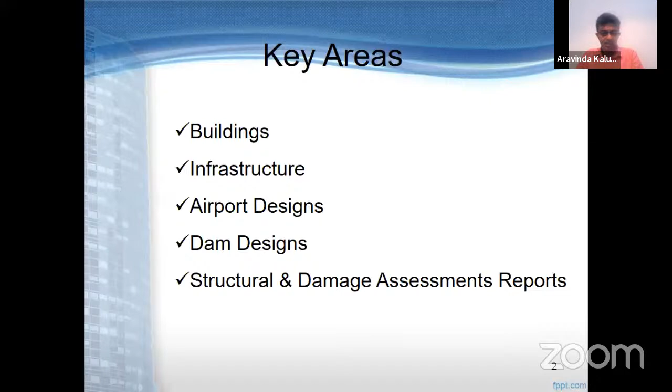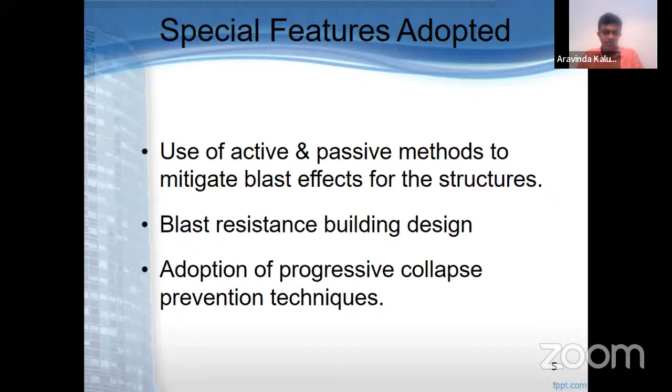And the special building - I will start with building for the special building because we have done many buildings, but of course we have done some special buildings. One is the Defence Headquarters Complex, where the employer was the Ministry of Defence. CECB was the whole consultant, and the contractor was Strike Forces. Some of the key features of this project were the use of active and passive methods to mitigate blast effect on the structure, blast resistant building design, and adoption of progressive collapse designs.

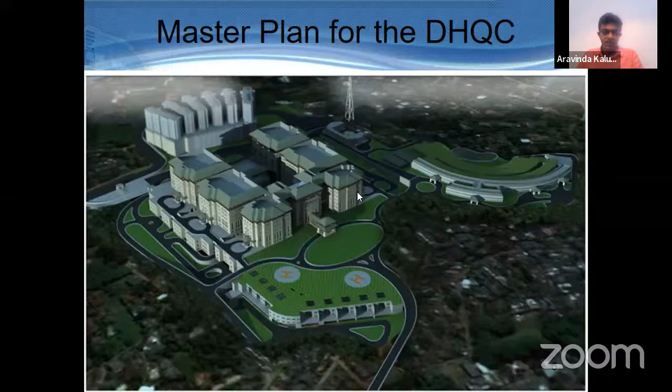And you can see the complex - it is 8 individual units connected to each other, and this administration block is there, with 2 parts yet to be commenced. One is the officer mess, the other is other ranks' officer accommodation. I hope that will also start in future. So this is the final appearance of the building of the part that we had already completed.

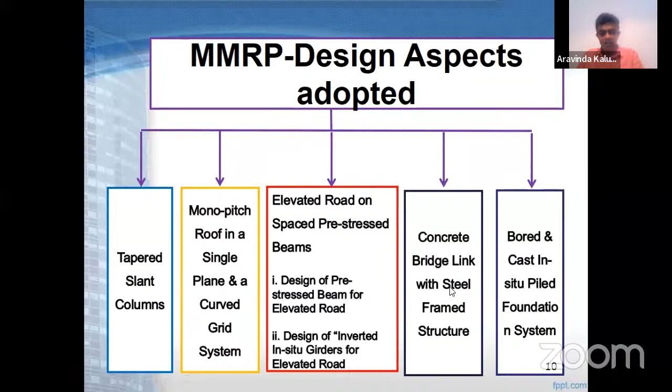And then under the infrastructure development project, I would like to give some brief on this Manning Market. This also shows our capabilities of being modern-like in building design. There are a few design aspects to be highlighted: one is the taper slanted column - you can see this feature as you go through the highway - and the monopitch roof, and also the elevated road resting on the pre-stressed beams. And this concrete bridge links with the steel frame structure, and bored piles we had done in full. So some of the featured elements are shown there.

I'm actually going very fast because I know this is not the time to talk on this subject.

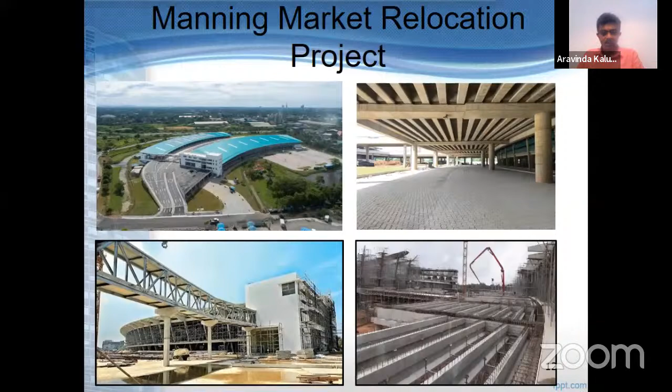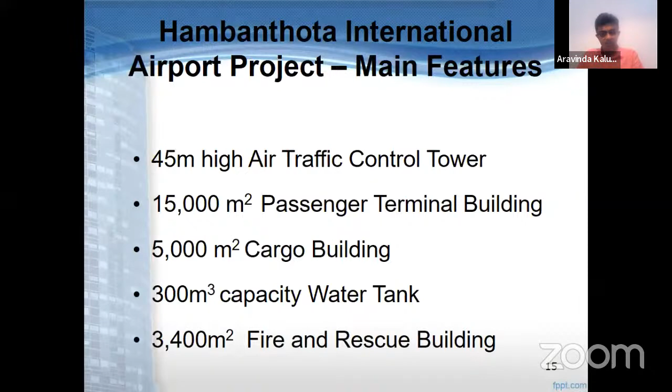And these are the things that you can see. We have also done some airport design, as mentioned, Sarasi. The Mattala Airport design, structural design was our scope, and we did a 45-meter high air traffic control tower and a 15,000 square meter passenger terminal building, cargo building, water tank, and fire rescue building.

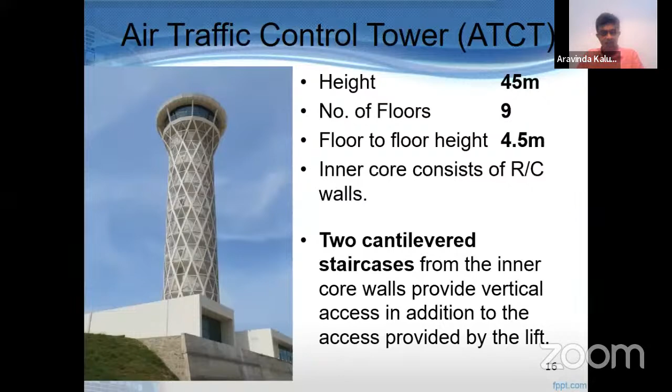So you can see the ATCT, which I think is the most visible building in the complex. It is 45 meters in height, 9 stories, 9 floors, with 4.5-meter floor heights, and 2 cantilevered staircases as a feature, which you might see when you visit the premises.

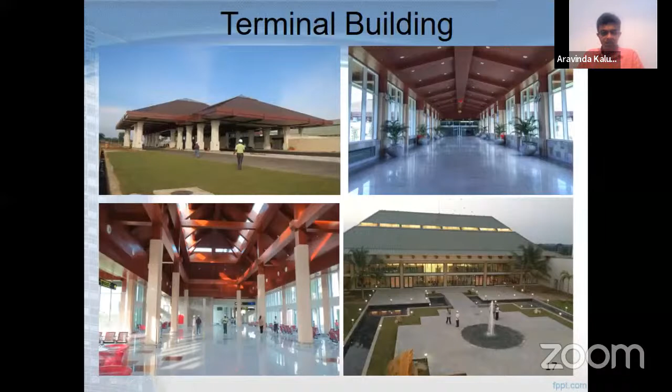So this is what you can see from there. You can see these very elegant structures, based on the architectural inputs we received from an Austrian architect. One thing I could mention here is that we actually got these services from others - this is a good example of how we can work with foreign consultants. ACOM was the designer, we were the structural engineer, and China Harbour was the contractor.

And these are some featured buildings - the cargo building, a very tall building in its day. This has about 100-meter length and 50-meter width, with a large space provided for the cargo.

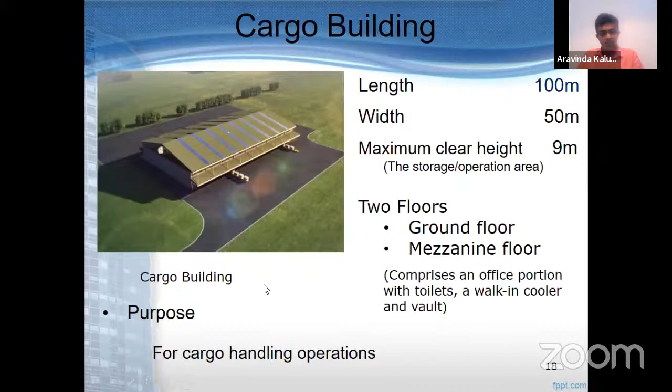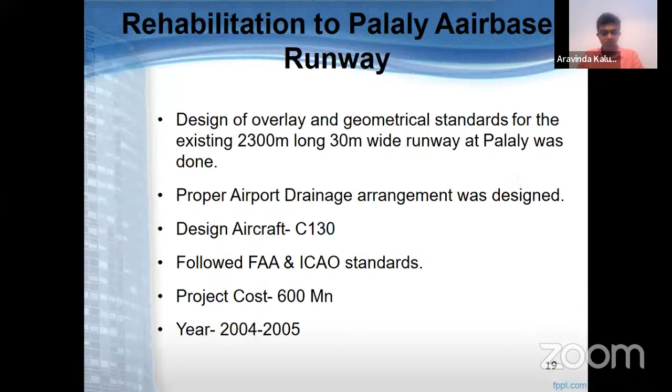And the rehabilitation of runways - actually we had done some runway work at Ratmalana that was not implemented, but we have done the Palaly Air Force Base runway rehabilitation, and we have the capabilities of doing that. And dams and large reservoirs is another featured and landmark

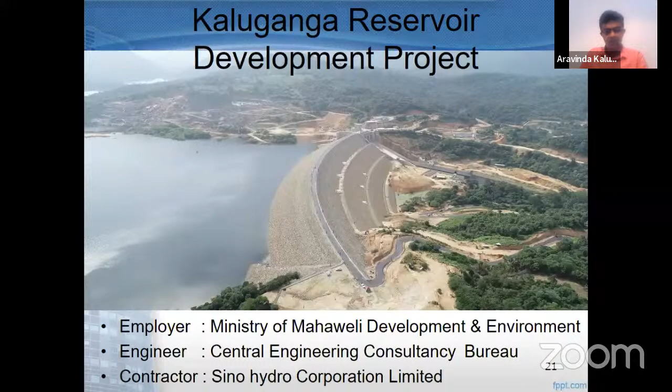capacity of CECB, and one recently developed project was the Kaluganga development, though we had done many in the past. This has got a 618-meter length, 68-meter rockfill dam, and also a saddle dam of 720-meter length.

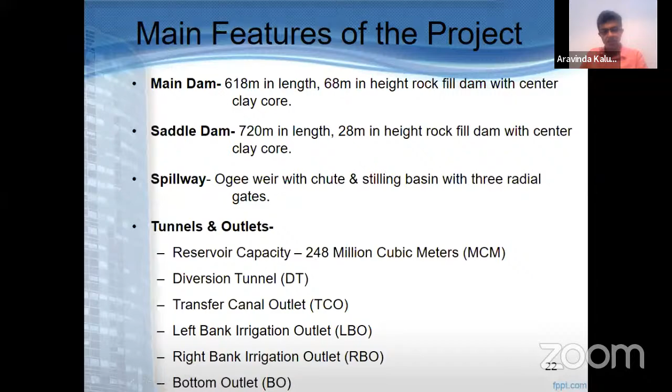And these are other features. 248 MCM capacity reservoir we built actually. And then you can see the overall view of the Kaluganga project.

And one featured thing that we are doing today is structural assessment and retrofitting, where the demand is growing. In the retrofitting area, we can talk about a few areas like fire damage, bomb blast resistant retrofit of buildings, and retrofitting of deteriorated buildings.

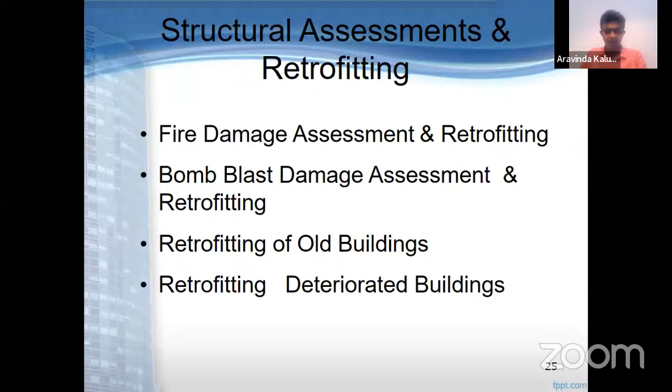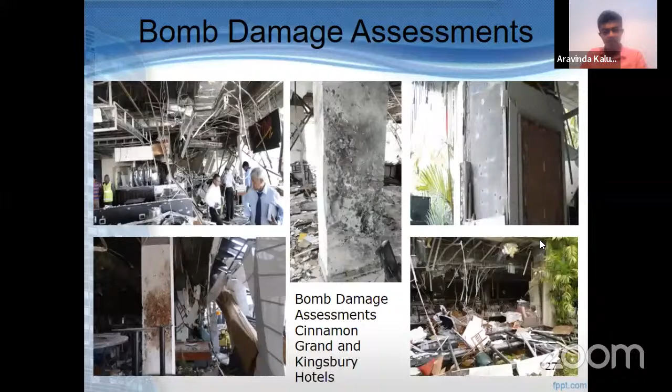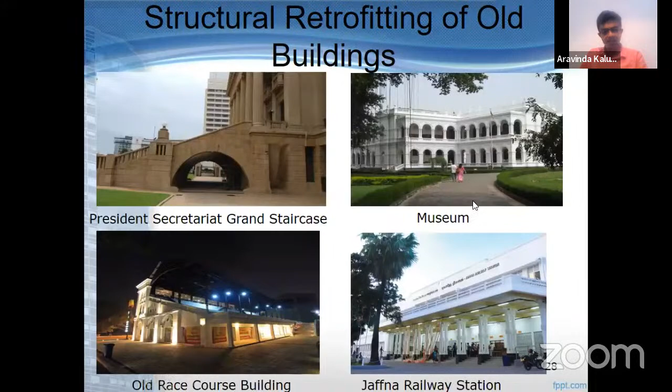And also we did the retrofitting of old buildings like the President's Secretariat, Museum, and the Race Course building, and also in Jaffna. These are some of the highlights.

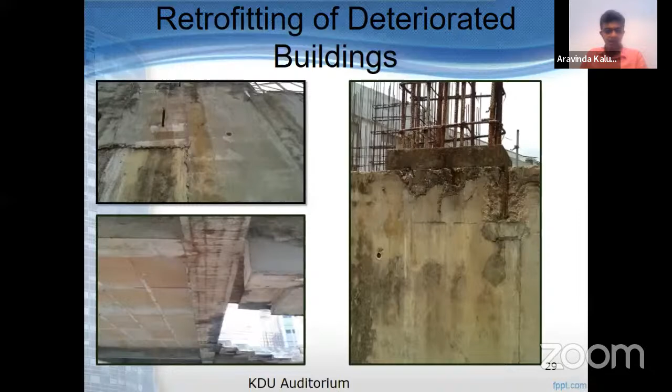And also the retrofitting of the deteriorated building is the KDU partly completed building, which we undertook to renovate and reconstruct. Now it is at the last phase of the project.

And with that, I will conclude my presentation, because I hope there are many more waiting on your side. So I will stop my video sharing, and the next thing I want to say as a summary is that - I hope this will not be the end of our journey, and I hope there will be many more CPDs and knowledge sharing sessions in the journey as we expect to conquer the world.

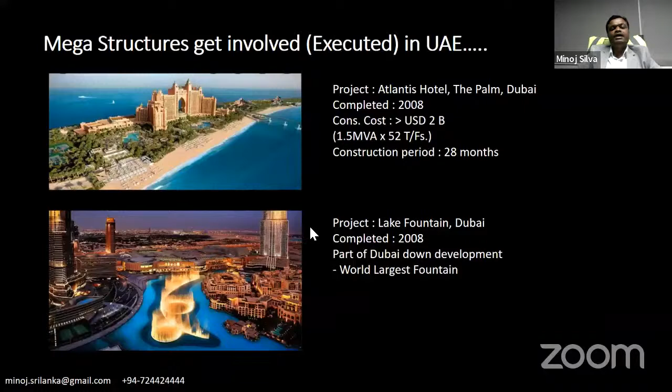Then I have worked Lake Fountain, Dubai also as a testing commissioning engineer for some months for the same company. Then some other mega structures in Dubai. I think who has Middle East experience, they should know these projects.

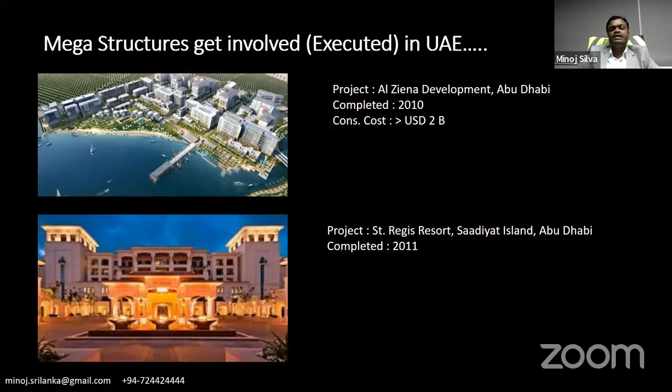So when I resigned from Dubai work, I finally worked for New York University, Sadiyaat Island, Abu Dhabi. It is again very big projects. Why I explain this project is through my case studies and knowledge sharing.

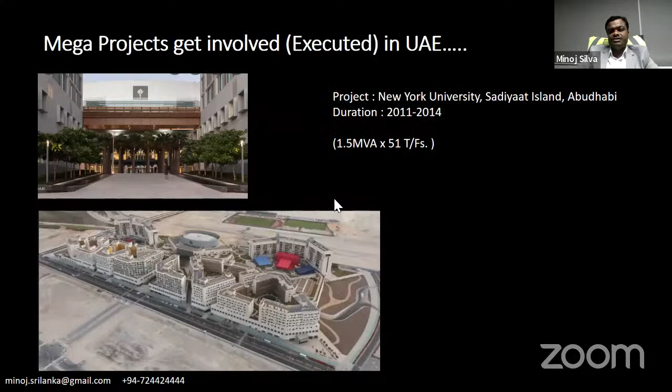In coming slides, I will use these projects. So these projects I have involved in as construction. During the construction, it's been part of post-construction team. Also during my time in BK Gulf, in normally Middle East, as Nalin explained...

In 2008, a new concept they started to practice: pre-construction. It came with the international global financial crisis. It badly hit Dubai as well. Then in the project management model, they practiced pre-construction. Pre-construction means - I will explain later more.

So these are the pre-construction projects I personally was involved in. Some projects we got, some projects we lost. It means Tameer Towers in Reem Island, Cleveland Clinic Hospital Abu Dhabi. This is at that time. This has been called a 7-star hospital. 7-star means it's a luxury hospital for the royal family as well.

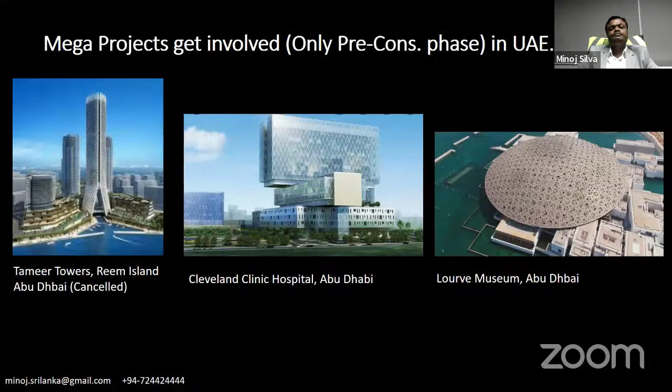So Louvre Museum - this is a branch of Paris Louvre Museum. So these are the pre-construction projects I involved in.

Today's session I am going to discuss these areas: international construction market size and growth rate, analyze the history and future of construction industry, today's engineer role in competitive construction industry, pre-construction in modern construction industry, and pre-construction tools and benefits from pre-construction with some case studies.

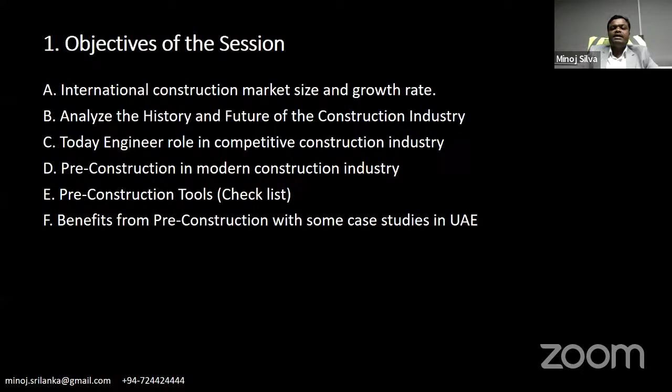Sadly in Sri Lanka now, our construction market has been dead - almost dead. That's the reality. As per my knowledge, and I think some of you also are very well aware, this will not come up to like previous progress till 2025, 2026.

But as engineers, as I said, engineers are not made for the local. Engineers are made for the global context.

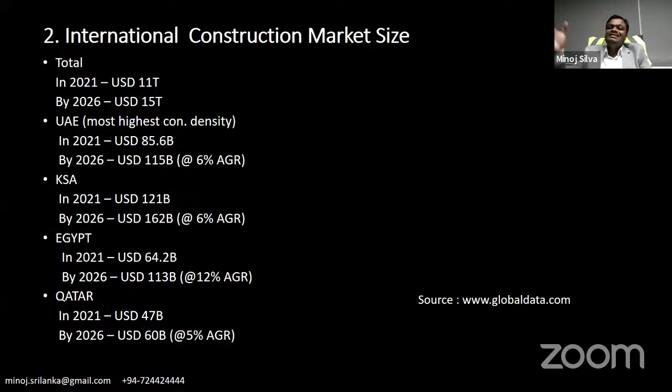Then sometimes you have to find a job for yourself or your company in other regions. You have to plan for that. So as a smart engineer, as I explained, you should study the history and the future in the relevant region.

Some case study from the past: Palm Dubai. I think I mentioned it in the first lecture, which explained about Palm Jumeirah, so I'm not going to explain that again. Construction started in 2002, reclaiming the island, and it opened in 2008. At that time this project was called the 8th World Wonder, that's how they internationally announced it. The developer is Nakheel.

From 2000 to 2010, the Dubai economy and Dubai construction were related to this concept, which came from Palm Jumeirah. So South Asians, Sri Lankans, Indians, got a lot of jobs in Palm Jumeirah. Now that is history. I will show one video.

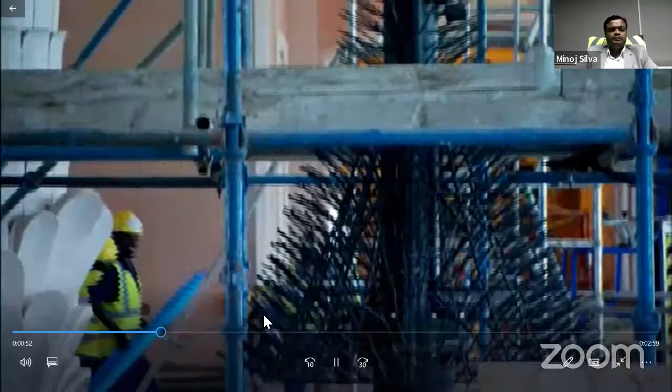Training, we're now getting ready for the big arrival of our first guest. I'm so pleased about the over 2,000 employees we have here to look after our guests, seeing the camaraderie of the team come together. We have over 42 nationalities, and each one of you is going to make the difference for our customers. I'm so excited about receiving the first guest with you, and looking forward.

What I'd like to say to the folks that built it and to the guys setting up to operate it, is that I'm very, very pleased, our board are very pleased with everyone, and my thanks go out to everyone. I have huge confidence that just as we built a great resort, we're going to operate one of the greatest resorts in the world.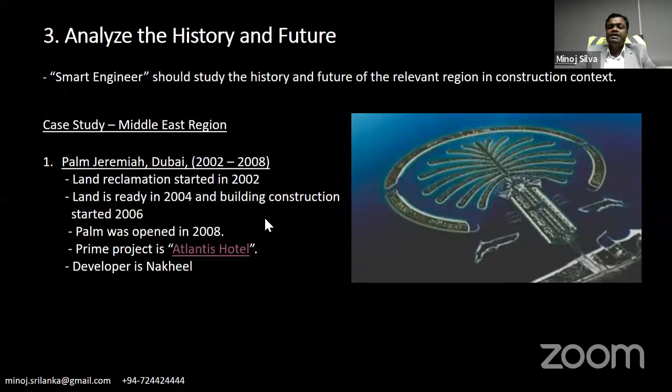Then in Middle East history, from 2004 to 2009, this development was called Downtown Dubai. Major projects were Khalifa Tower, the world's tallest, Dubai Lake Fountain, Dubai Mall, and a series of hotels and commercial residences. As I know, Nalin also worked in Dubai Mall, the world's largest mall, so he has a lot of experience there.

I think sometimes you might have visited there, or heard about it from the web, or seen YouTube videos about that. So in this event, they planned for the next 10 years of construction.

I am not going to explain the Dubai Expo concept, why they made it. You can study on the internet what their objectives are to achieve with Dubai Expo. Why I explain these things is that as engineers, dynamic engineers in construction, you should study the international picture, where things are happening and where they are not happening, etc.

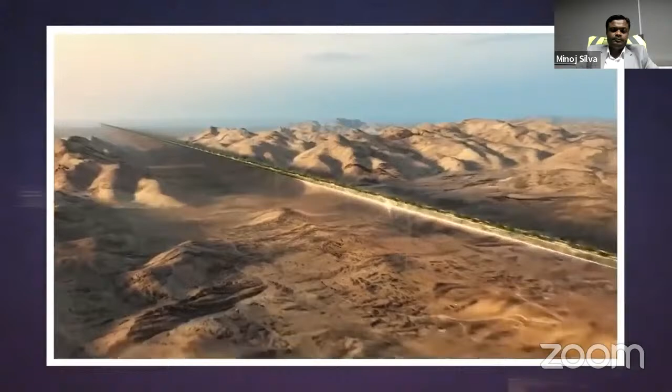In January of 2021, Saudi Arabia announced plans for its own futuristic city called The Line. Instead of communities sprawling outward from a central location, they would be built vertically and arranged in a line, hence the name. Even though the vision for the city stretches 170 kilometers, it would do away with cars entirely and instead be connected by high-speed rail that would travel the entire length in just 20 minutes. Each individual community would be largely self-contained so that almost anything you could need, be it a school, a doctor, or a quick meal, would be only a 5-minute walk away.

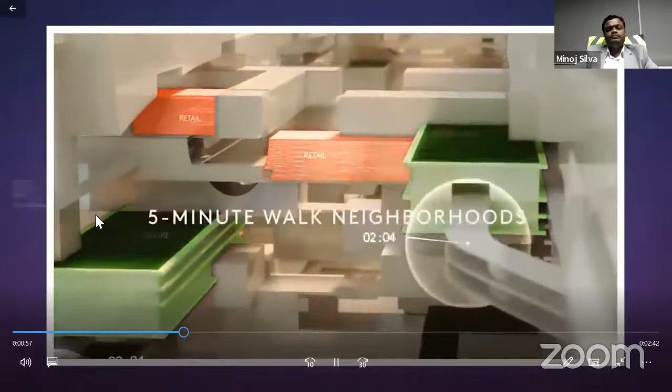The government says the line will run on 100% clean energy and make extensive use of sensors and AI to manage the city's services. And all of this is supposed to be nestled in the pristine natural landscape of the Tabuk province with minimal impact on the environment.

Now the Saudi Crown Prince Mohammed bin Salman has revealed grandiose renders of what the city will look like to match the grandiose plans. The line is envisioned as a giant glass and mirrored wall, 170 kilometers long, 200 meters wide, and 500 meters tall. That's taller than the Empire State Building. It would have greenery stretching along the top, an open air ventilation system to help maintain an ideal climate year round, and it would house up to 9 million people.

Yeah, I'm not going to show the entire video due to time constraints.

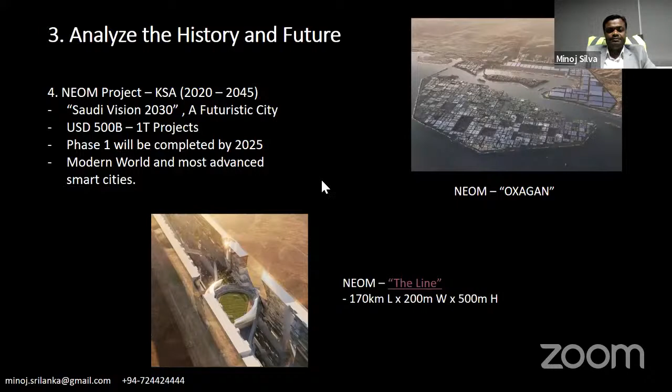Engineers' role in the construction industry in today's world. This is very important. So these are the key matters which engineers should have.

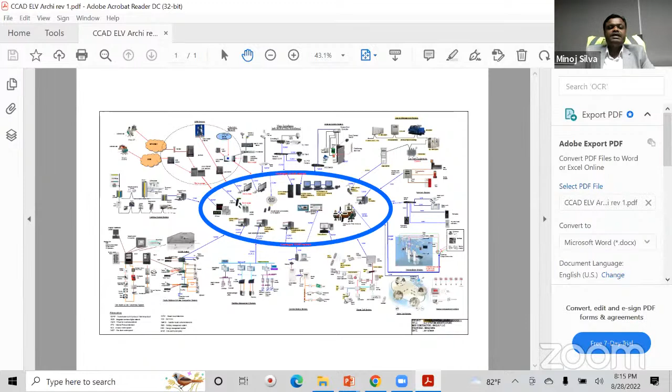I need to share these case studies also with you. When we worked in Dubai in pre-construction, this is called system architecture in ELV systems. I personally made this one during the pre-construction period when we bid into the project.

This is Cleveland Clinic, what I explained before - very complicated ELV systems. There were 3 bidders involved during pre-construction, including our company. We thought about it and created this ourselves as system integrators, and presented it at our pre-construction bidding meeting. After that, it brought great value for ELV systems from presenting something like this.

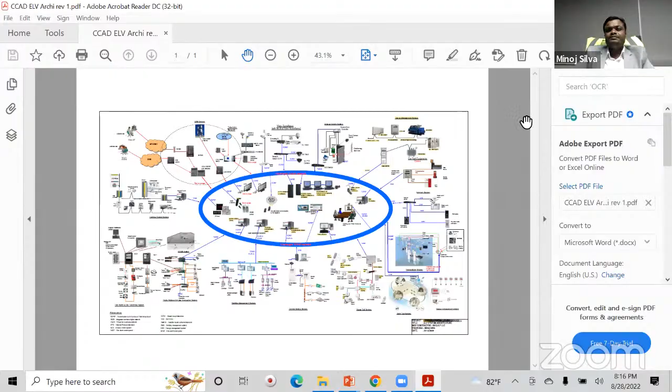This is not single line diagrams - in the Middle East this is called system architecture. We did this for another project, the Louvre Museum, called MSI. We did the same and got the same result.

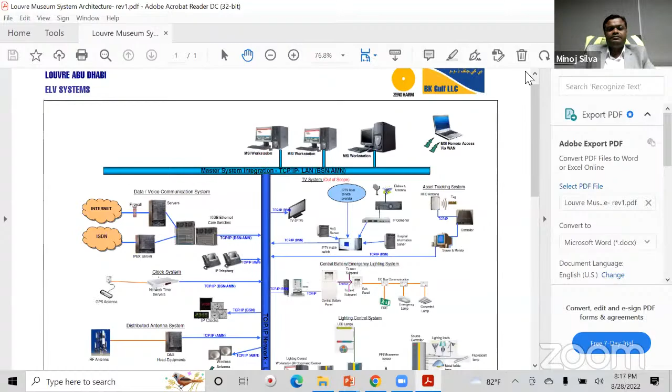Why I explain these things is as an example of thinking out of the box and doing your best. I think everyone knows about this topic, this slide and content - I included it a bit for fresh engineers. You can categorize any project into these categories.

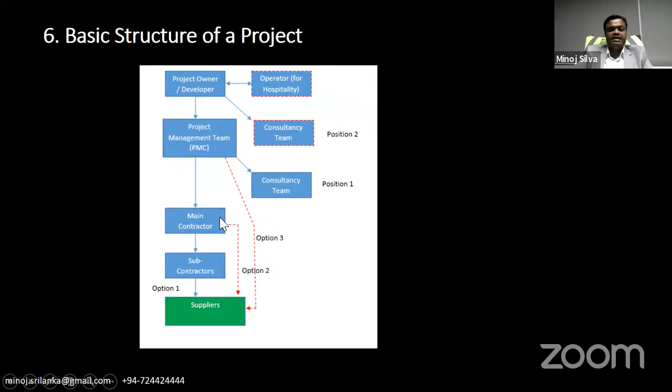When we select a project, these are the factors we should consider - from the developer's side, the consultant's side, and the contractor's side. They should study about these. The scale of the project.

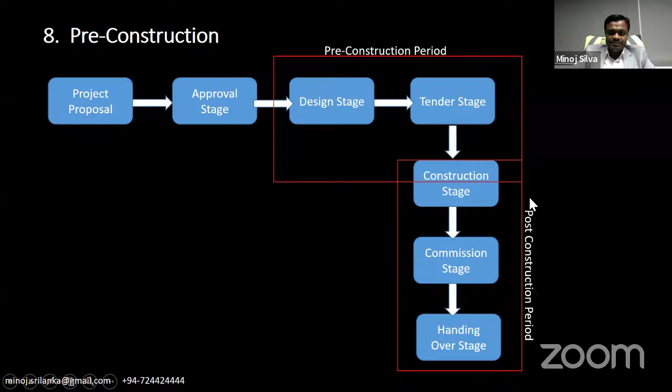So pre-construction stage, from a contracting point of view: pre-qualification process, then technical bid, commercial bid. Under commercial bid, normally for international or big projects, they call for two bids - base bid and value engineering bid. I will explain later what value engineering is.

Base bid is 100% as per the tender documents. The value engineering proposal is an alternative proposal which reduces the cost while keeping requirements the same as per the employer's requirement. So tender documents normally include general specification, technical specification, tender drawings, and BOQ.

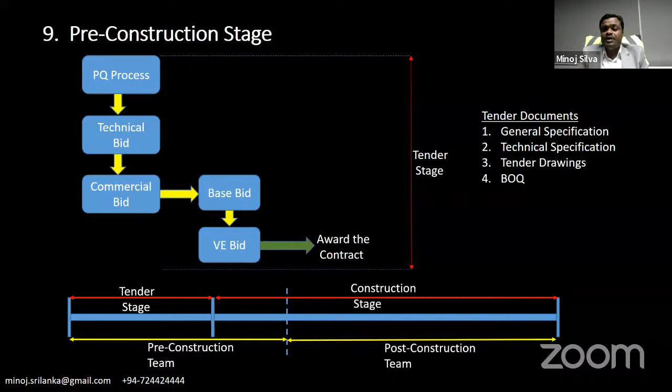Pre-construction checklist. During the pre-construction period, there is an opportunity to work together with developers, consultants, project managers, and the bidding team - this is the pre-construction team. Therefore, there's an initial meeting to discuss project details, including internal and external objectives.

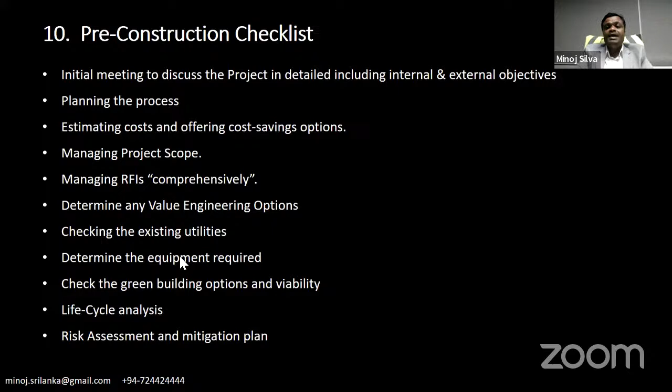Those are the pre-construction checklist items to be prepared during the pre-construction period. Benefits of pre-construction - these are the benefits we can achieve from pre-construction.

Provide more accuracy and detail of the project cost. During the design, consultancy side or project management side, QS makes engineering estimation. I think you have very good knowledge about engineering estimation. Once project execution phase comes, big differences are there. We have to reduce that gap. Therefore, pre-construction processes are very important to reduce those gaps.

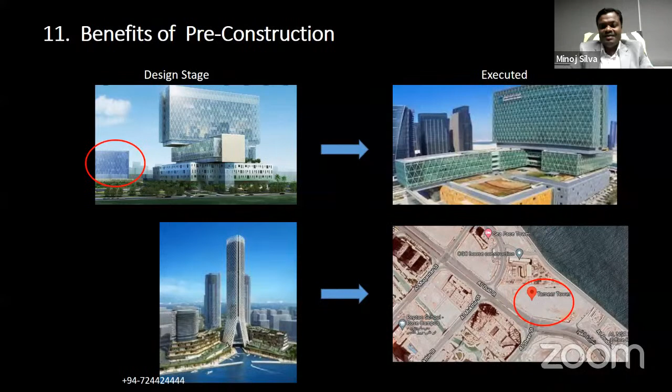So this one also - I think if you have only Sri Lankan experience, you might not know about this model. If you have Middle East experience, you know this model.

This is another model - the pre-construction model.

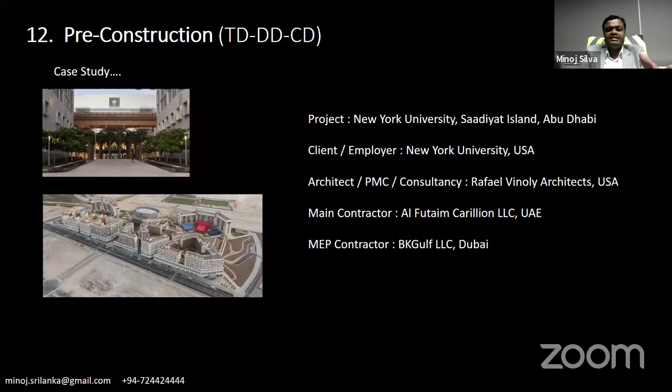මොකද අපේ ලංකාවේ consultancy firms වලට වගේ නෙමෙයි, මේ වල payment terms ගොඩක් ලොකුයි. ඒ කියන්නේ ලොකු major payments තමයි consultancy firm වලට යන්නේ. ඒකට මෙයාගේ මේ fee එකත් පොඩ්ඩක් අඩු කරගත්තා. ඒකේ පැත්තේ cost saving එකක් කරගත්තා client.

Get value addition to the project from qualified bidders. ඒ කියන්නේ අර මම explain කරපු වගේ, qualified bidders, pre-qualified contractors, solution providers, especially when you talk about IT ELV systems, solution providers and integrators like IT system key manufacturers. ඒගොල්ලන්ගේ inputs they are collecting during the pre-construction, that benefits can be added to the project.

ඔක්කොම ටික එකට එකතු කරගෙන ඇනලයිස් කරලා risk factors, end of the day අපිට successful project එකක් deliver කරගන්න පුළුවන්. නැත්තම් ගොඩක් වෙලාවට වෙන්නේ ලංකාවේ තියෙන experience එක අනුව design කරලා, ඒක execute කරන්න totally different technology එකක් වෙන්නේ. design කරපු ඒවා ගාව manufacturers ලා ගොඩක් projects වලට international experience තියෙනවනම් මම මේ කියන කතාව හොඳට තේරෙනවා.

Right? Early startup of initial civil work. ගොඩක් වෙලාවට වෙන්නේ ඔක්කොම ඉවර කරනකන් ඉන්න එපා general conventional method එකට construction start කරන්න. හැබැයි මේ project එකේ, case study එකට ගත්ත New York University එකේ මෙතනදිම client, මෙන්න මේ හරියදිම, 10% විතර design එකෙද්දි start up කරනවා. ඒ කියන්නේ පයිලින් ගහලා ඒ ටික nominate කරගෙන subcontractors ලා වෙනම journey එකක් යනවා.

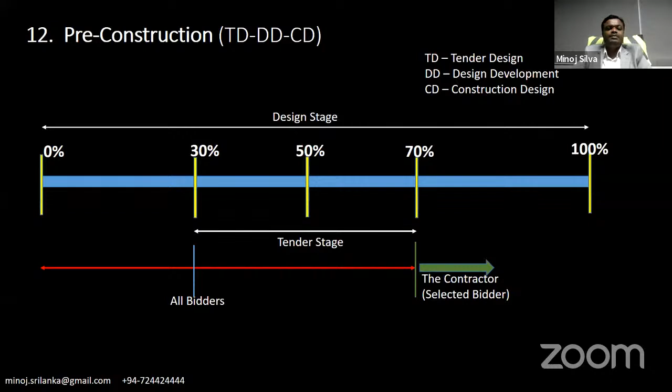Right? ඒතර මේ ඔක්කොම ඉවර කරන්න ඕනේ නැහැ, project එක චුට්ටු පටන් ගන්න පුළුවන්. ඒතකොට අර time frame එක අපිට mitigate කරලා reduce කරගන්න පුළුවන්. Right?

I will explain briefly about value engineering. Value engineering is a system, and this is the general definition of it. If you have theoretical knowledge about value engineering, you know it is a systematic, organized approach to providing necessary function in a project at the lowest cost or less cost.

Through case study, I will use a couple of examples. Value engineering promotes substitution of materials and methods with less expensive alternatives without sacrificing functionality.

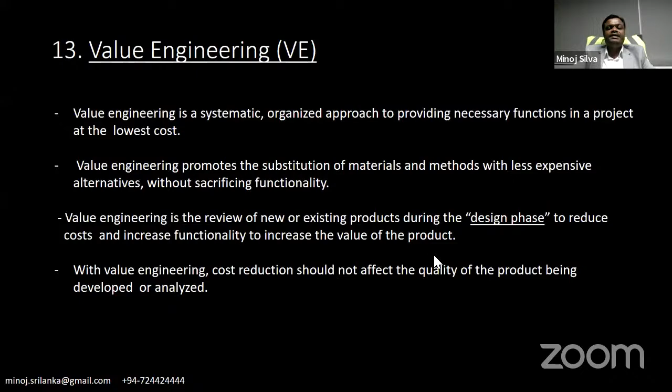This project, as I explained before, used an Atlantis package bus duct system in the power distribution system. I think MEP engineers know what a bus duct system is. Normally, to distribute power, a duct system or bus bar system is used instead of cables.

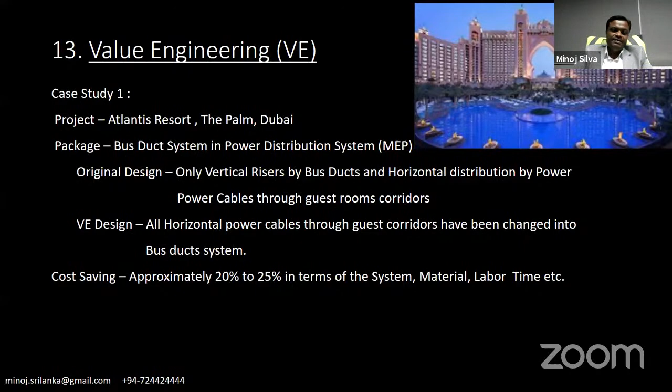In the Middle East, in this project we have practiced prefabrication, containment and modular wiring.

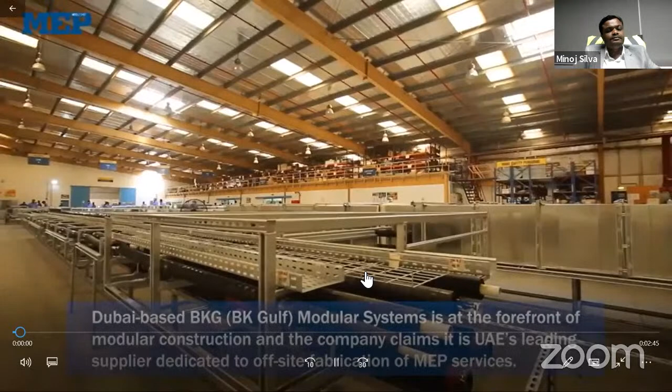BK Gulf's modular systems division was established in 2000. We can produce up to 1,800 modules a month. At the moment, we're running easily within 1,200 to 1,400 modules in production in a month, and that's purely just for our standard corridor riser modules. In addition to that, we probably have around about 15,000 and...

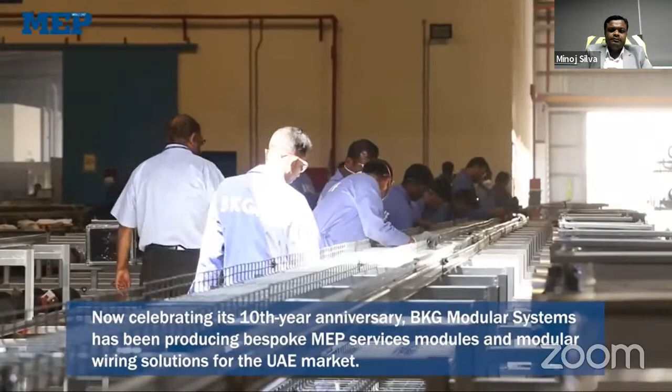We see the market improving quite radically when it comes to prefabrication, off-site construction. I think that's partly driven by the market. Like in UAE, there still are good projects.

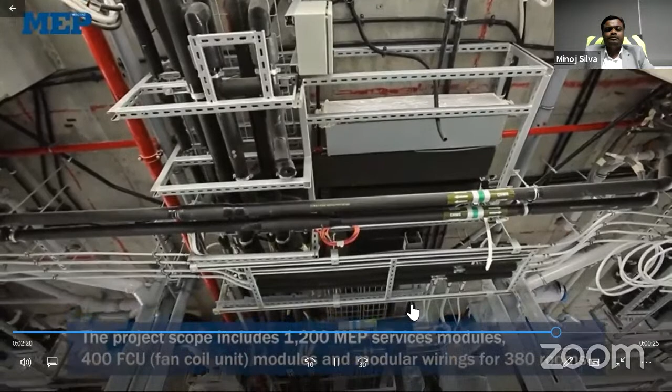So for those who don't know about prefabrication, I think you got some idea from that video. I think you understood the quality at the sites and how the installation has been done.

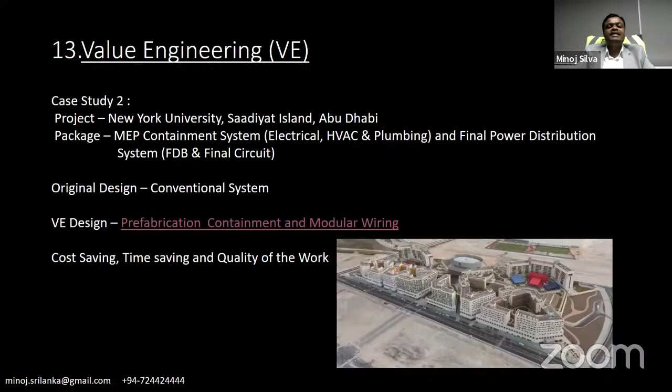Nalin? Yeah, I think Minoj, your final message would have been spoken well in English as well. I think that is very important - that the conventional engineer and how he or she has to move forward.

Please, there are some non-Sinhala audience as well. So please - okay, so what I explained was in Sinhala. I explained in Sinhala because we have to discuss the truth. During my life in UAE, and still when I travel, sometimes we engage with a lot of engineers in Sri Lanka who don't have international exposure, so that some engineers are much more experienced than us.

Recently I did some project management consultation for one of the leading government bodies. We got to know that our engineers' knowledge is static, not dynamic. So when these engineers go to the international level, they face a lot of challenges and can't cross the barriers.